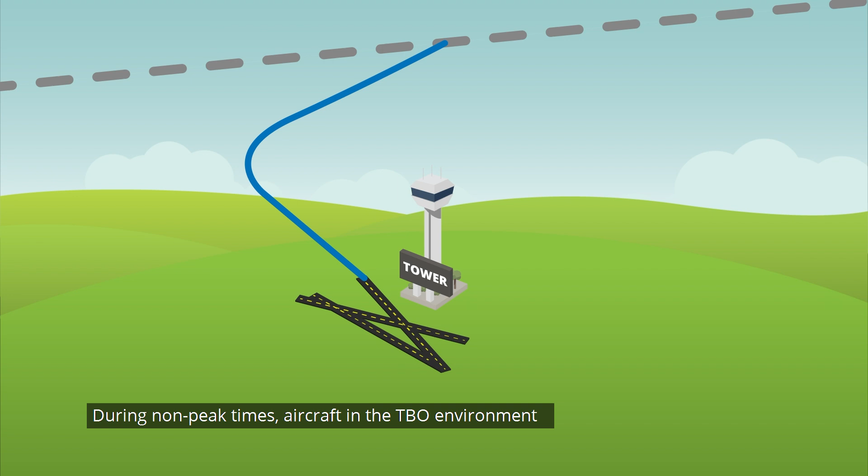During non-peak times, aircraft in the TBO environment enter the NAS in essentially the same manner as in the pre-TBO environment. There is less need for complex automation and controller decision support. Airspace users file their flight plans and provide aircraft status information to FAA automation. Traffic management personnel use this information to anticipate aircraft movement from origin to destination and use their predicted trajectories to proactively address potential capacity to demand imbalances throughout the NAS.

In the pre-TBO environment, traffic management personnel and controllers have limited decision support to help them manage aircraft flows in the NAS. Limited in both functionality, what types of problems it can help with, and availability, where in the NAS controllers can use it effectively. Additionally, most of these decision support tools were designed to help manage local constraints and have not yet been integrated. As a result, they cannot adequately evaluate downstream constraints and cannot help with complex strategic or system-wide solutions.

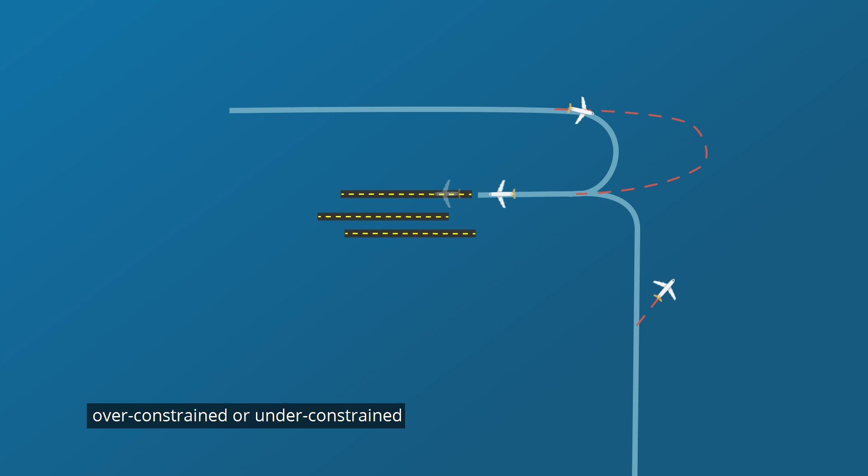As demand increases in the pre-TBO environment, miles-in-trail, playbook routes, and other static restrictions are often needed to manage congestion. Such blanket restrictions are difficult to surgically apply to particular aircraft in the traffic flow. As a result, traffic flows may become over-constrained or under-constrained, potentially leading to lost throughput opportunities or a need for additional controller intervention such as vectoring or holding to achieve the proper spacing. Sustained periods of imbalance in airport capacity and demand levels may require activation of ground delay programs and, in severe cases, ground stops.

In the TBO environment, traffic management personnel and controllers will have access to a suite of time-based management, or TBM, tools. Decision support with improved functionality and targeted availability throughout the NAS. This support can be customized to address site-specific operating conditions, integrated across different flow management functions, and used as needed to strategically manage aircraft movement throughout the NAS.

A key cornerstone of the TBM concept is a network of meter fixes and arcs, which are strategically placed to manage constraint points in the NAS. This network focuses on improving the timeliness of aircraft reaching their arrival runways by simultaneously sequencing multiple traffic flows all the way back to their departure runways, and by applying applicable spacing through shared resources. TBO is focused on ensuring that aircraft are able to land on the arrival runway at their destinations in a timely manner and move through the NAS as the system is able to accommodate them.

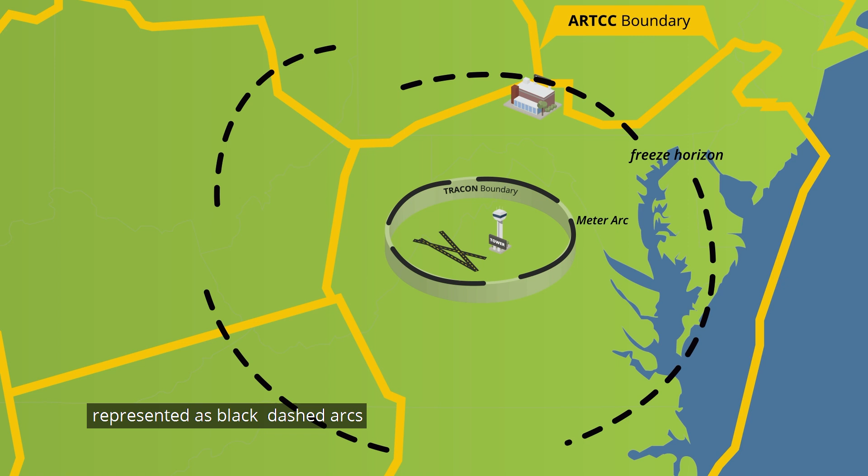Each meter arc is associated with a freeze horizon, represented as black dashed arcs. When an aircraft crosses one of the freeze horizons, the system estimates the time of aircraft arrival to the meter arc based on the flight plan routing and aircraft performance characteristics, determines the earliest time and position of the aircraft in the sequence of aircraft over the meter arc, and schedules the aircraft into metering timelines by accounting for the applicable spacing and determining any delays that may need to be absorbed by individual flights in the sequence. The sequence number and the timing of this aircraft in the metering schedule is now frozen, and only necessary changes may be applied by controllers and traffic management personnel as needed to address any unexpected developments.

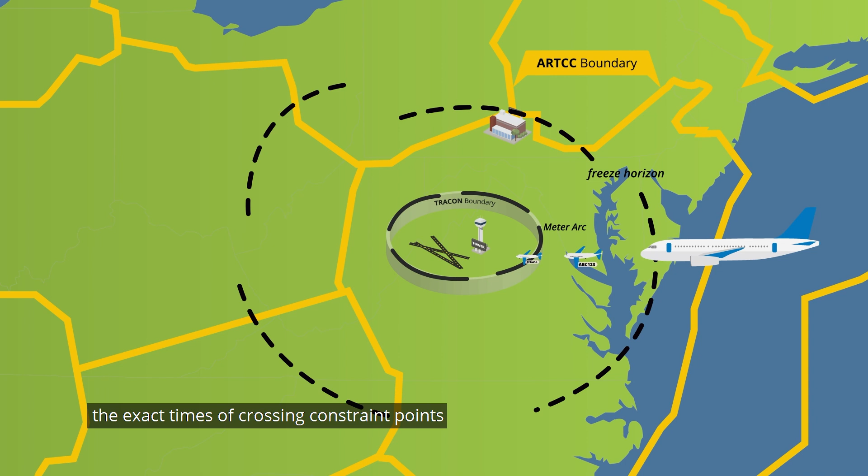Aircraft outside of the freeze horizon are also known to the system, but their movement is still too uncertain for finalizing their schedules. Uncertain because of airborne winds and possible deviations from expected routing, and therefore uncertain in terms of the exact times of crossing constraint points. As a result, successful TBM requires management of aircraft movement upstream of freeze horizons in a manner that is harmonized and consistent across the participating facilities. To help deliver the right rate of aircraft to arrival metering freeze horizons, TBM relies on the following additional airborne metering capabilities.

Adjacent Center Metering, or ACM, enables the system to receive aircraft position data from adjacent en route centers. With ACM, the system becomes aware of the aircraft before it enters the arrival center, which enables metering to start in the adjacent centers. By expanding the distance from destination over which aircraft are actively metered, compliance with schedules can improve. However, ACM lacks the ability to schedule flows inside the adjacent center's airspace, and only allows for TBM calculations and delays to be passed back to it.

Coupled scheduling introduces the ability to incorporate additional freeze horizons and provides sequencing through additional constraint points prior to the meter fix.

Similar to coupled scheduling, extended metering, or XM, is an advanced airborne metering capability that enables both delay passbacks to adjacent en route facilities and sequencing of upstream flows. This capability uses its own meter arc and freeze horizons that extend the distance from destination over which aircraft movement is managed. Adjacent center metering, coupled scheduling, and extended metering enable TBM of airborne aircraft. Departure scheduling and surface metering, on the other hand, support TBM of aircraft prior to takeoff.

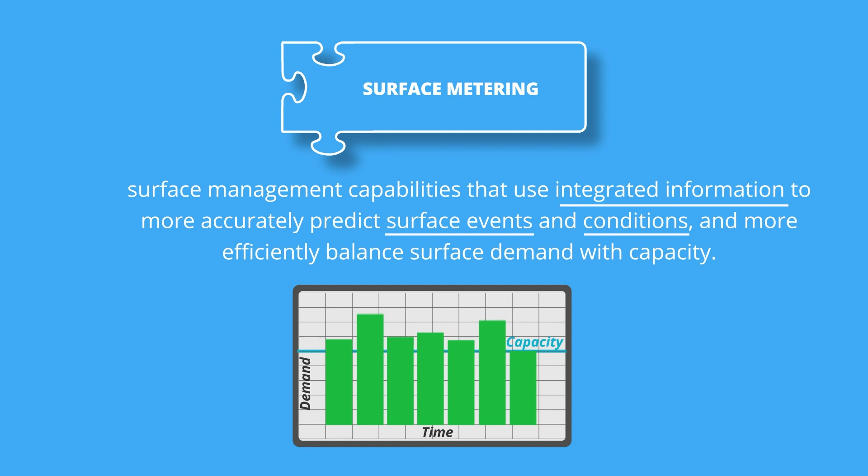Surface metering completes TBM prior to takeoff. It is part of a broader set of future surface management capabilities that use integrated information to more accurately predict surface events and conditions and more efficiently balance surface demand with capacity. Integrated information includes status updates provided by operators, runway configuration, and departure release times. Surface metering enables tower controllers to act on the improved predictions and schedules, resulting in smooth movement of aircraft on airport surfaces.

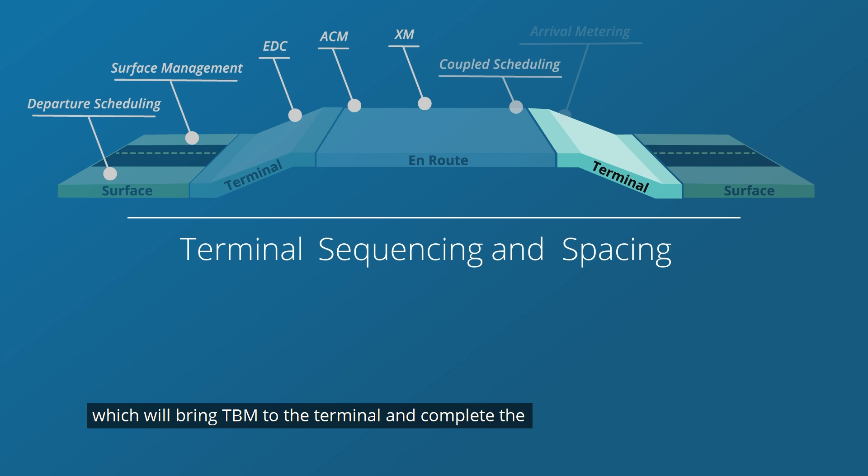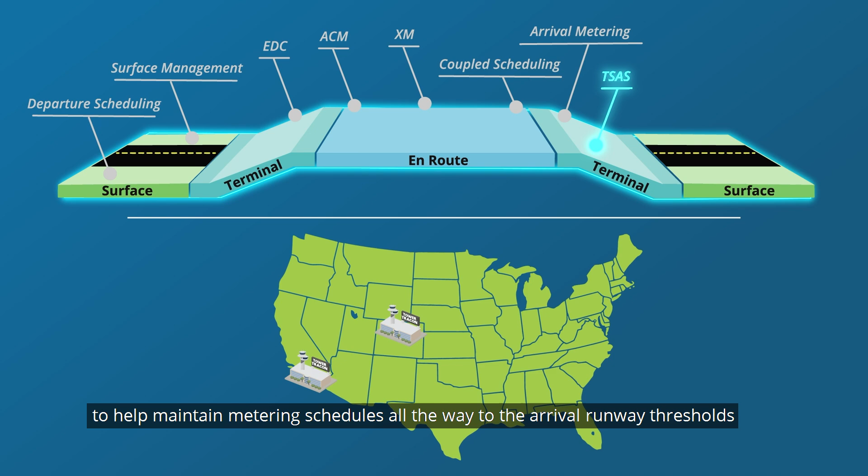Finally, another future capability, Terminal Sequencing and Spacing, or TSAS, will bring TBM to the terminal environment and complete the integration of TBM decision support tools across all phases of flight. This capability will be introduced at select busy TRACONs to help maintain metering schedules all the way to the arrival runway thresholds. TSAS will provide tools to TRACON controllers to help them maintain the runway-specific sequence and metering schedule. As long as an aircraft stays inside their slot marker, merging and sequencing will happen as scheduled through each key constraint point inside the TRACON.

It is important to point out that, even after TBM capabilities are deployed and integrated, and quality of accuracy and information improves, some uncertainties will remain in the NAS. Airborne and surface winds, severe weather events, and other schedule disturbances will continue to present challenges and will sometimes cause unexpected delays. These types of disturbances are especially problematic when resulting delays need to be absorbed over a short distance to the next facility or the destination.

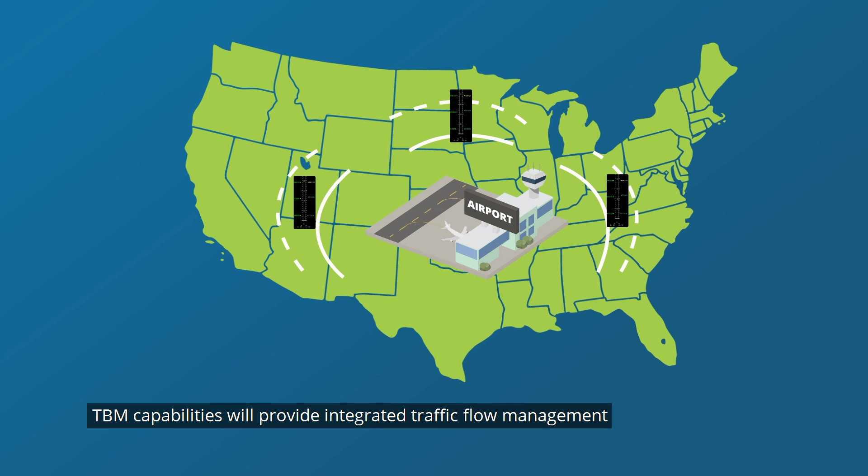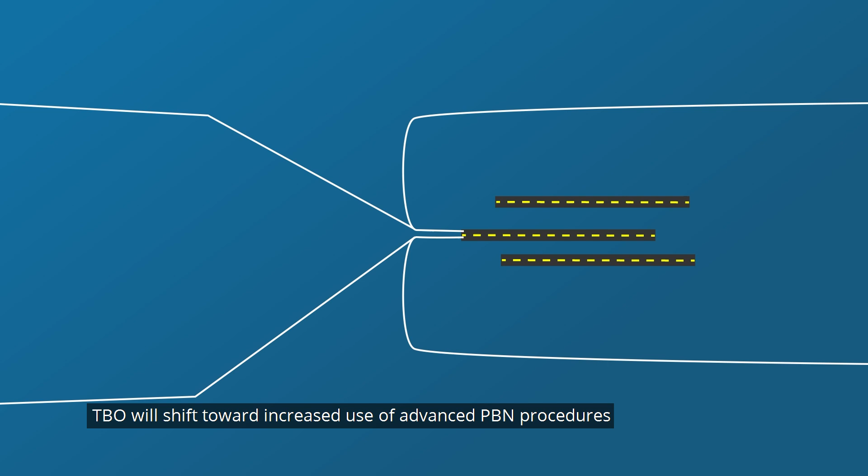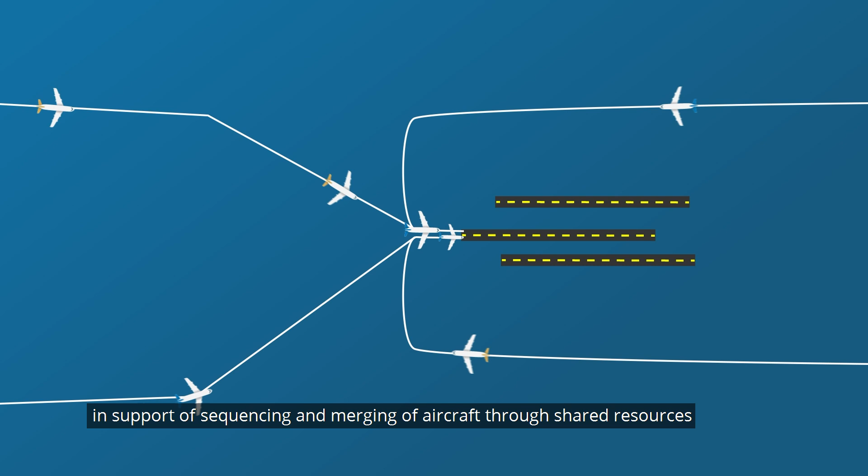In spite of the challenges, TBO will bring significant operational improvements to the NAS. TBM capabilities will provide integrated traffic flow management across functions and facilities and will be strategically implemented at select locations as needed to support traffic flows and operations across the NAS. TBM applies spacing only when needed to support sequencing and merging of aircraft, and alleviates the need for static restrictions. TBO will shift towards increased use of advanced PBN procedures in support of improved compliance to TBM schedules. In turn, improved compliance to TBM will alleviate the need for lateral maneuvers in support of sequencing and merging of aircraft through shared resources, and enable even higher increase in PBN utilization.

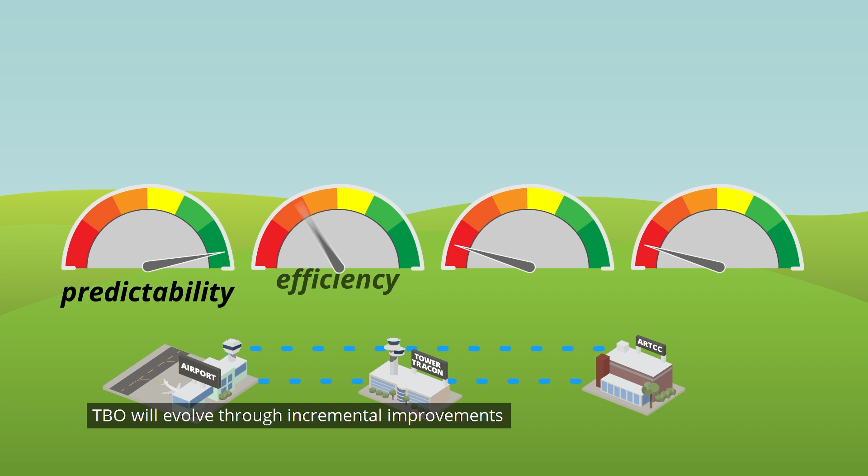Many of the activities performed by traffic management personnel, controllers, and pilots will be supported by automation and electronic communications. This increases timeliness and effectiveness of air traffic management. Controllers and traffic management personnel will remain responsible for safe separation of traffic and managing of uncertainties in the NAS. TBO will also facilitate seamless coordination between towers, TRACONs, and en route facilities. TBO will evolve through incremental improvements that build on each other over time and deliver increased predictability and efficiency of NAS operations.